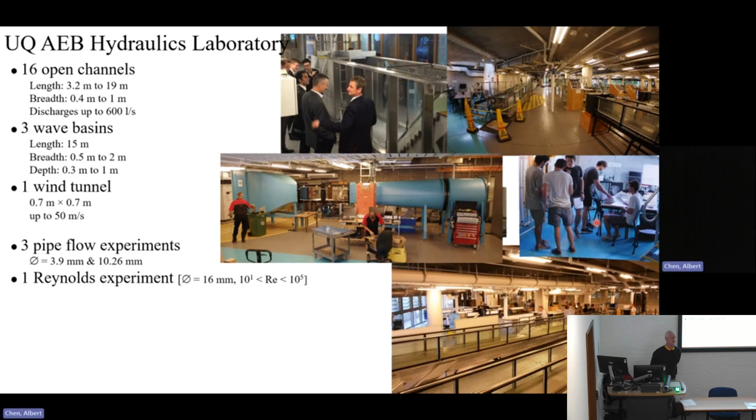And all these flumes are used for teaching experiments, and we have typically a total of 10 to 12 compulsory laboratory practicals that each of our students are doing during their undergraduate teaching.

These facilities are complemented with traditional and more advanced instrumentation: ultra-high-speed video camera, 1 million frames per second, phase detection probe, ADV profiler. But we continue to use a Prandtl pitot tube, a pointer gauge, and a Preston tube. They still have their value for a number of experiments.

I joined the University of Queensland 34 years ago. I'm not young anymore. I've been, for all that time, a teaching and research academic, like most of you academics, a teacher. I'm doing 40% teaching, 40% research, 20% service and administration.

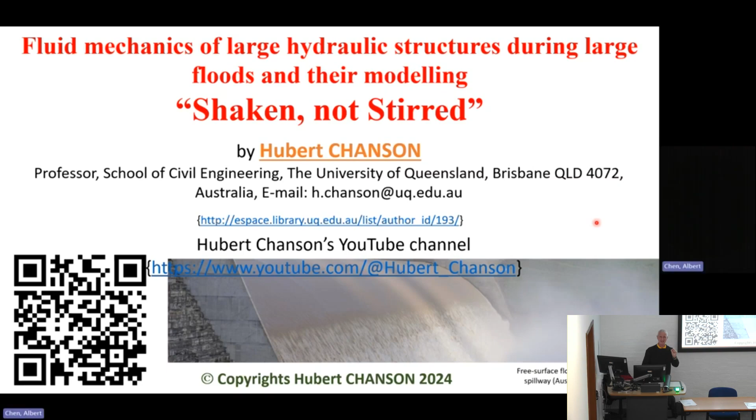But in the spirit of conciseness, let's go to this talk. I would like to share with you some thoughts in relation to the fluid mechanics of large hydraulic structures during major floods, with the focus on their hydraulic modeling. And to some extent, this talk could have been entitled 'Shaken Not Stirred,' because I aim to shake your confidence in our capabilities to model these monsters.

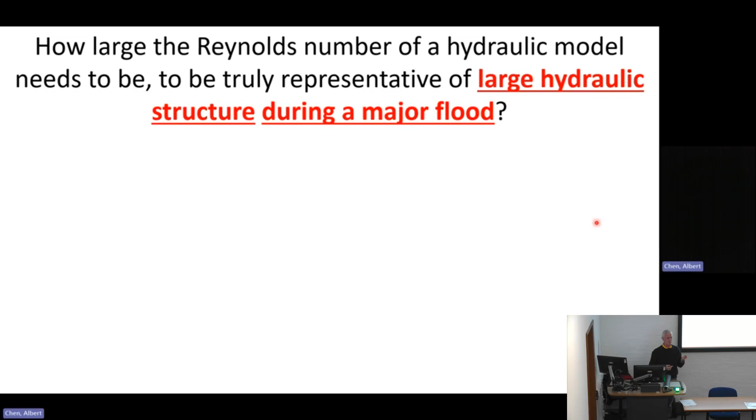We are going to try to address 3 key questions together. How large does the Reynolds number of a hydraulic model need to be to accurately predict the performance and characteristics of a large hydraulic structure during a major flood?

Can we trust hydraulic model data collected with a Reynolds number between 10 to the 4 and 10 to the 5 to predict the performance of large hydraulic structures? Here the expression hydraulic model refers not only to a physical model, but also a theoretical model or a computational model, with the Reynolds number being the Reynolds number of the validation data set.

On the third question: are prototype tests conducted for short duration and small discharge genuinely representative and good enough?

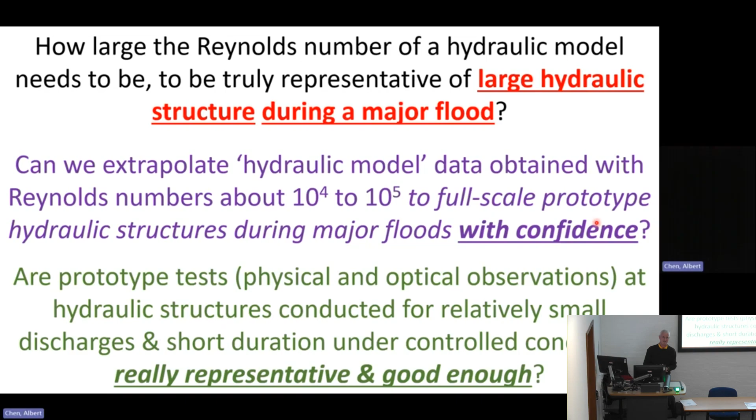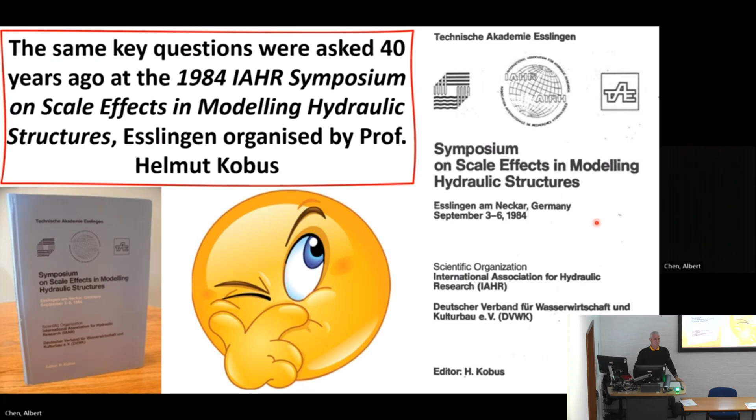Interestingly, these questions are not new. They were already discussed 40 years ago at an IAHR symposium in Esslingen. And unfortunately, we have not progressed much, as indeed there have been quite a few failures of hydraulic structures since.

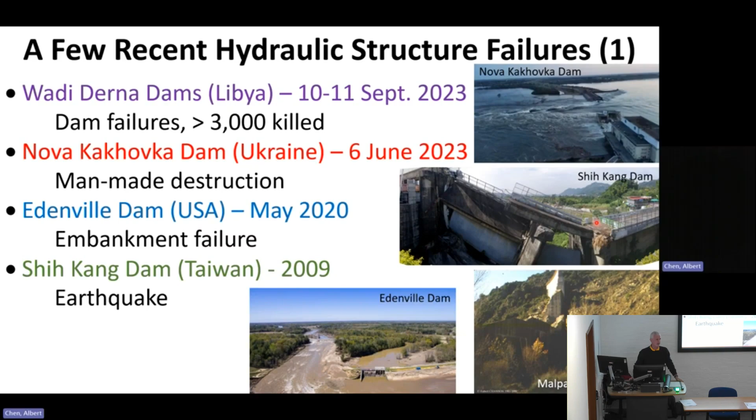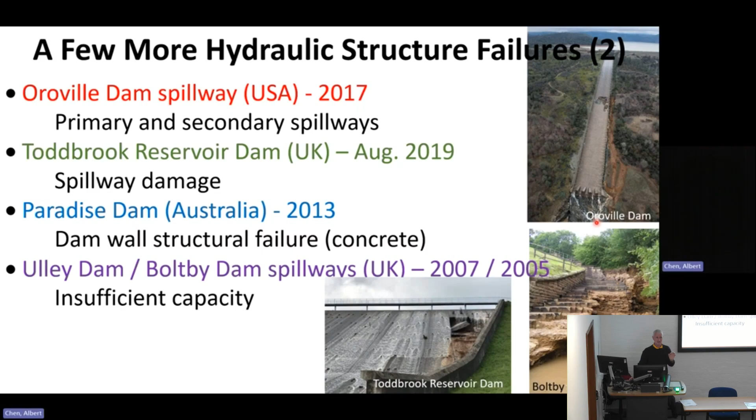We may remember the tragic failure of 2 dams in Libya last year, the destruction of a dam in Ukraine last year again, Oroville Dam spillway, Paradise Dam, and even here in UK, some problems with the Toddbrook Reservoir and Ulley Dam or Boltby dams, which were all near misses. So back to our topic.

We are going to talk a lot in the next 30 minutes about the Reynolds number. And I remind everyone that the Reynolds number is a dimensionless ratio of inertial force to viscous force.

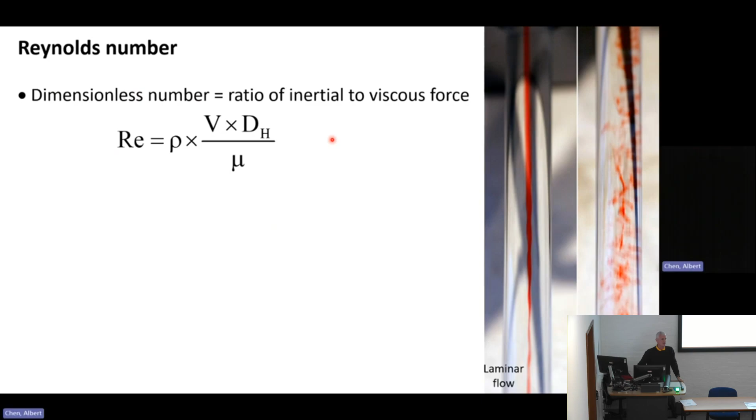Today I will use the definition shown in front of you on the screen, in terms of the cross-sectional average velocity and equivalent pipe diameter. That is the most common definition used in industry. It's the definition used in the Moody diagram. And with that definition, we can distinguish between laminar and turbulent flow on the right-hand side.

This is our experiment at the University of Queensland.

Within commercial pipes and channels, turbulent flow is observed when the Reynolds number is greater than 10,000, that is 10 to the 4. Today I'm going to be blunt: I'm going to talk about turbulent flow only.

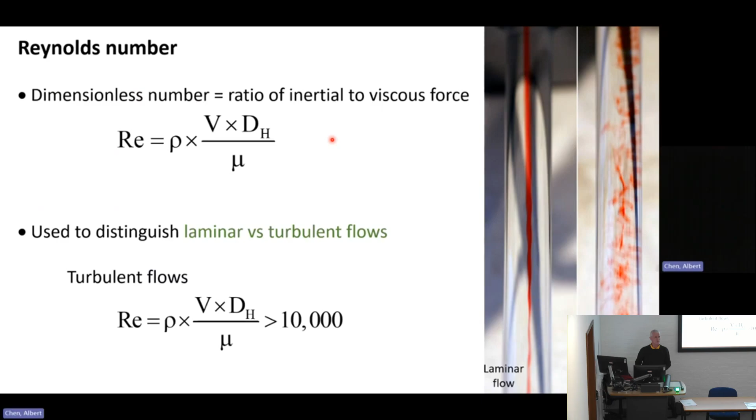So what is a turbulent flow? What types of turbulent flow can we encounter? A very well-known canonical turbulent flow is a developing turbulent boundary layer.

Boundary layer, a concept introduced by Ludwig Prandtl in 1904. A few years later, in parallel with his own former student Theodor von Karman, Prandtl developed this equation called the momentum integral equation, linking the growth of the boundary layer properties directly to the boundary shear stress, shown here.

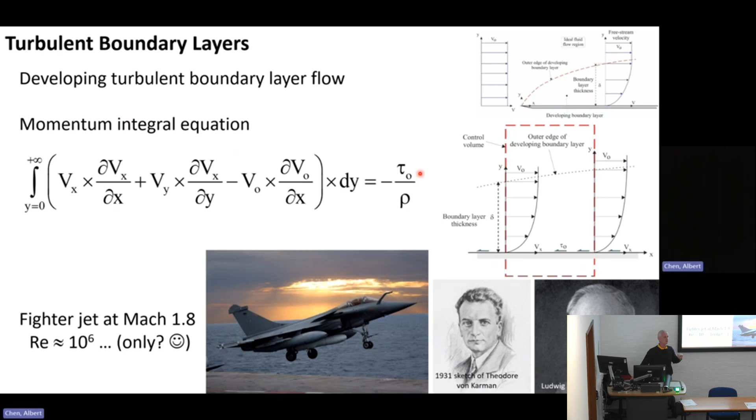If we think of a relatively well-known developing boundary layer, for example along the wing of an aircraft, and use a fighter jet flying at Mach 1.8, the Reynolds number of the boundary layer at the trailing edge is of the order of 10 to the 6.

Of course, another canonical turbulent flow is a turbulent pipe flow. Most of you should be familiar with smooth turbulent pipe flow and this famous equation developed by Ludwig Prandtl, based upon integration of the Navier-Stokes equation using the Prandtl mixing length.

Interestingly, this equation, which is the velocity profile in a smooth turbulent pipe flow, was developed by Ludwig Prandtl for the entire cross-section, not just a small region.

His students further contributed to a number of correlations, with the graph on the far right showing the Darcy friction factor as a function of the Reynolds number for smooth pipe flow. The red symbols are the superpipe dataset collected in North America in the late 1990s, compared with the correlation of Heinrich Blasius, a PhD student of Ludwig Prandtl, building on the work of Karman, Nikuradze, and Prandtl himself.

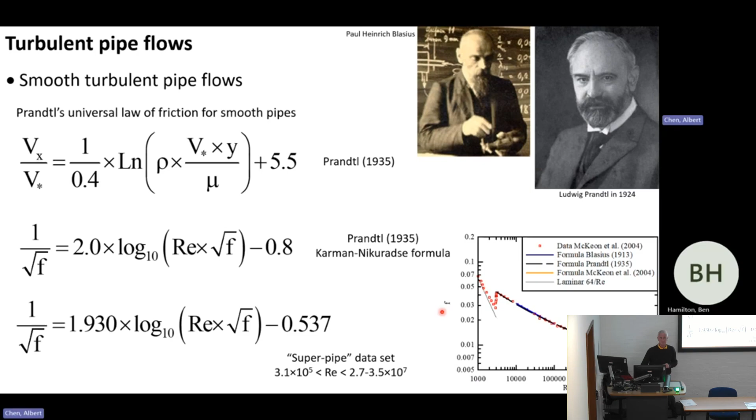Of course, another type of turbulent pipe flow is a fully rough turbulent pipe flow. Prandtl again developed an expression for the velocity profile, and his former student Johann Nikuradze developed this correlation of the Darcy friction factor for fully rough turbulent flow. Interestingly, this correlation is still valid many years later.

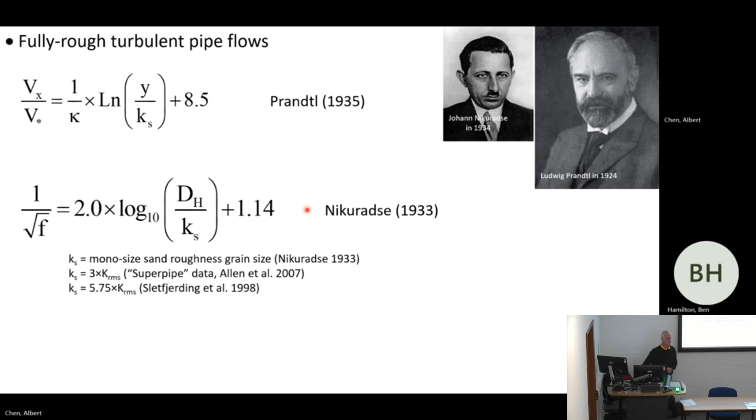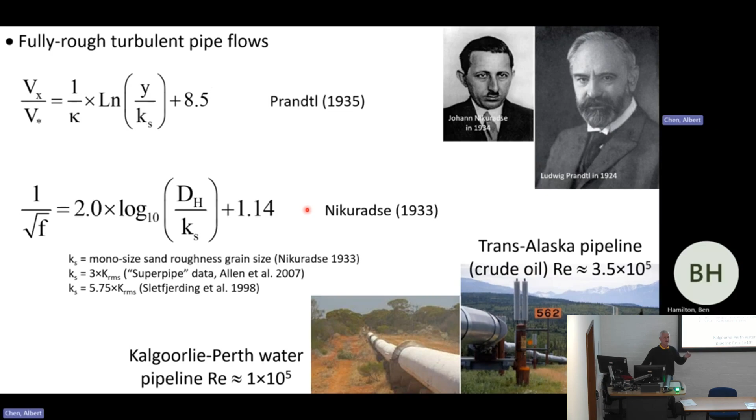Looking at commercial pipelines, for example the Trans-Alaska pipeline carrying crude oil, or the Perth-Kalgoorlie pipeline, 600 kilometers long, carrying water, at design capacity - that is 100% capacity - they operate with Reynolds number of 10 to the 5.

Of course, a third type of canonical turbulent flow is a turbulent free surface flow. Today I will restrict myself to free surface flow in large hydraulic structures during major floods.

These flows are turbulent, implying that when we do hydraulic modeling, the Reynolds number in the hydraulic model, subscript m, must also be turbulent, must be greater than 10,000.

When we do a combined Froude and Morton similitude, we will end up with a Reynolds number in the model, subscript m, much smaller than the Reynolds number in the prototype, subscript p. Thus the Reynolds number provides an order of magnitude of the flow because it's proportional to the mass flux.

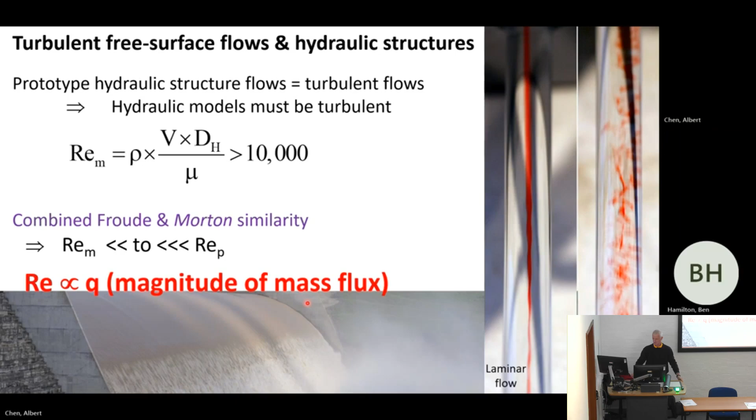Of course, at this stage someone could ask me, what about the Weber number? I mean, I talk about Reynolds, Froude, Morton - how about Weber? I could argue that in a large hydraulic structure there is no capillary effect. That's true, but that's very simplistic, and it's probably not the right way to teach the topic.

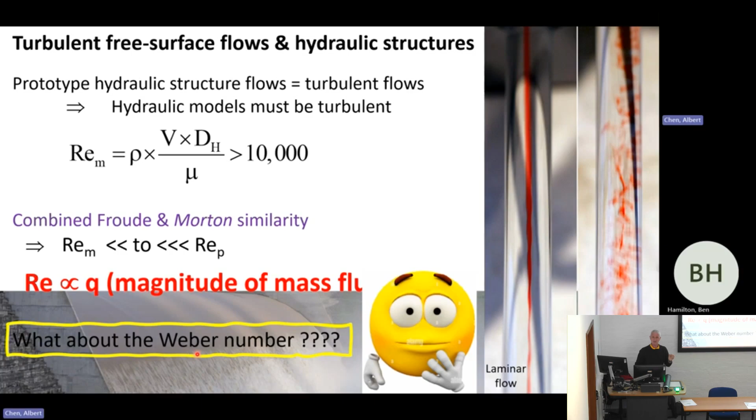There is, in fact, a much better justification, a more meaningful justification for ignoring the Weber number as I do. That comes to a dimensionless number called the Morton number, named after the lady on the bubble, Rose Catherine Morton, defined as a function of the gravity acceleration, fluid density, fluid viscosity, and surface tension.

Why is this number important? Because Professor Helmut Kobus showed about 50 years ago that the Morton number can be expressed as a function of the Weber, Reynolds, and Froude number.

If you remember the Vaschy-Buckingham theorem, also called the pi theorem, any dimensionless number can be replaced by a combination of itself and other dimensionless numbers. Thus, potentially, we could replace the Froude number, or the Reynolds number, or the Weber number by the Morton number.

Now, coming back to the modeling of free surface flow. In free surface flow, gravity effects are always important, so the hydraulic modeling must be performed using a Froude similitude, that is, the Froude number is the same in model and prototype.

Further, most hydraulics laboratories don't have a lot of money. That's the case at the University of Queensland, that's the case at the University of Exeter. We will use the same fluids in model and prototype, air and water, implying that the Morton number is going to be a constant between model and prototype.

So in turn, the Weber number is no longer an independent parameter, it is a function of the Reynolds number. When we do hydraulic modeling of free surface flow, implicitly nearly everybody is doing a combined Froude and Morton similarity. The differences in Reynolds number between model and prototype will account for potential viscous and capillary effects, while the Weber number becomes totally irrelevant.

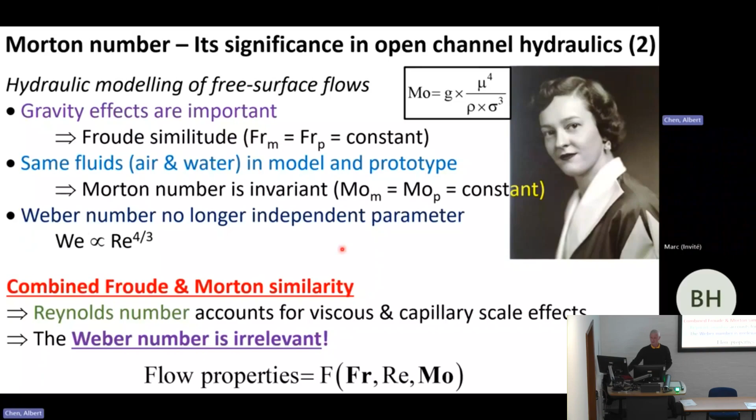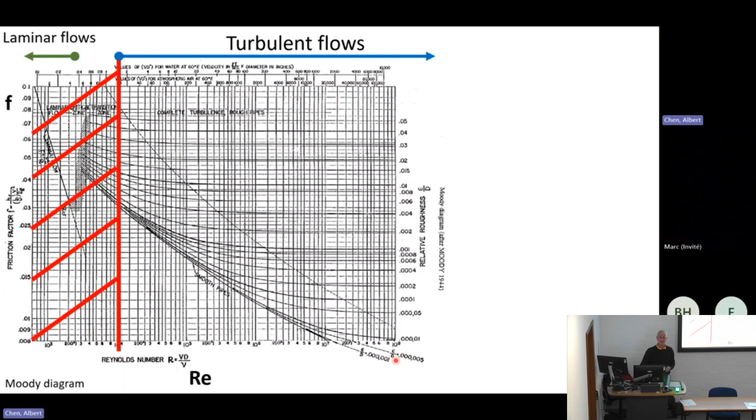We will ignore the left-hand side of the graph because we are only focusing on turbulent flow. If we are dealing with small hydraulic models, typically with Reynolds number between 10 to the 4 to 10 to the 5, this dashed area will illustrate the range in terms of the Reynolds number, but also in the range of the dimensionless boundary shear stress, with a lower limit corresponding to smooth turbulent flow. And I remind everyone, in particular students, that the flow resistance in Newtonian fluid flow cannot be smaller than that of smooth turbulent flow.

Large hydraulic models will operate with Reynolds number between 10 to the 5 to 3, 10 to the 6. You can see that on this dashed area, not only is the range of Reynolds number different, but we start to see some difference in the range of dimensionless boundary shear stress.

Small prototypes operating at small discharge for short duration, we operate with Reynolds number between 5, 10 to the 5 to 3, 10 to the 7. On large hydraulic structures during major floods, and you will see some photographs shortly, we'll operate with Reynolds number between 10 to the 7, 10 to the 8, 10 to the 9, and potentially more.

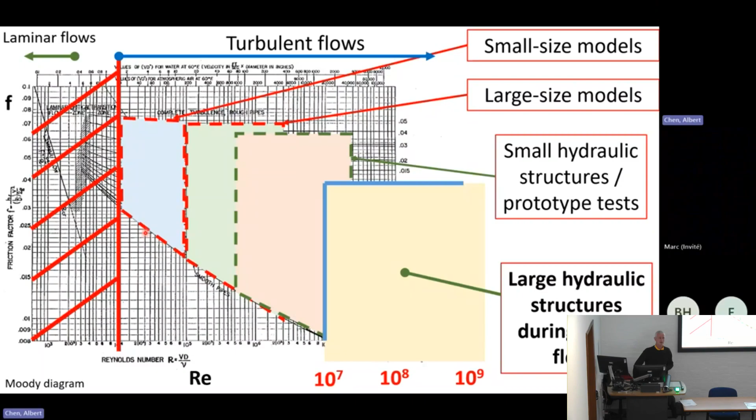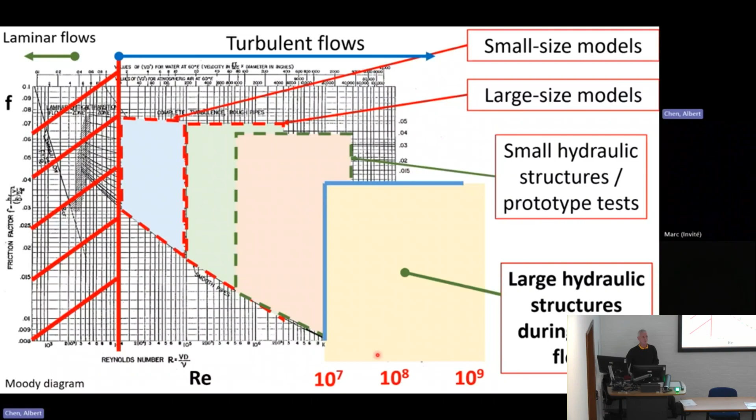And to paraphrase the Americans, we have a problem, Houston. We are outside of the boundaries of the Moody diagram, both in terms of the horizontal axis, but in terms of the vertical axis. So much for scaling, so much for modeling.

So let's talk about the key focus of this talk, and the key message I want to share with you: model prototype compliance for large hydraulic structures during major floods. I call this the inconvenient truth, and you will hear later on what I mean by that.

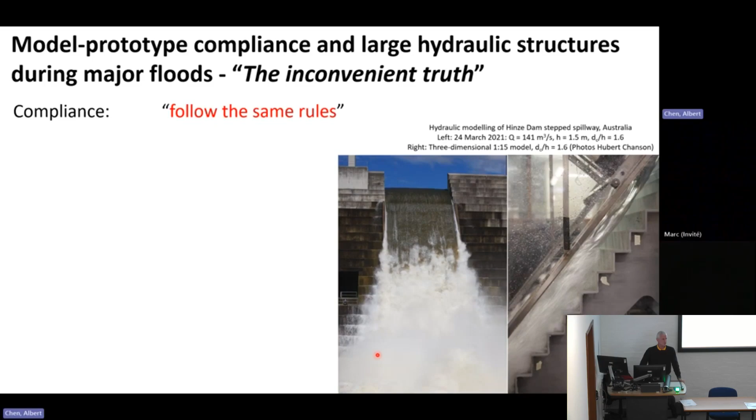I remind everyone that compliance means that we follow the same rules, the same rules of similitude - geometric, kinematic, dynamic similarity. We also follow the same basic equations of fluid mechanics: conservation of mass, of momentum, of energy.

Compliance might be qualitative or quantitative. I'm always skeptical of qualitative compliance because it's too close to visual illusion, particularly to people who have no experience in prototype hydraulic structures during major floods. Instead, as professional engineers, we should focus on quantitative compliance: at the 0th order, within 100%; at the first order, within 10%; at the second order, within 1%. And in hydraulic engineering, we never go beyond the second order.

Finally, when we talk about compliance, we need to emphasize that the notion of compliance is directly linked to the relevant design parameter. A hydraulic model might be compliant in terms of the discharge capacity and dimensionless discharge coefficient, but might not be compliant in terms of the rate of energy dissipation.

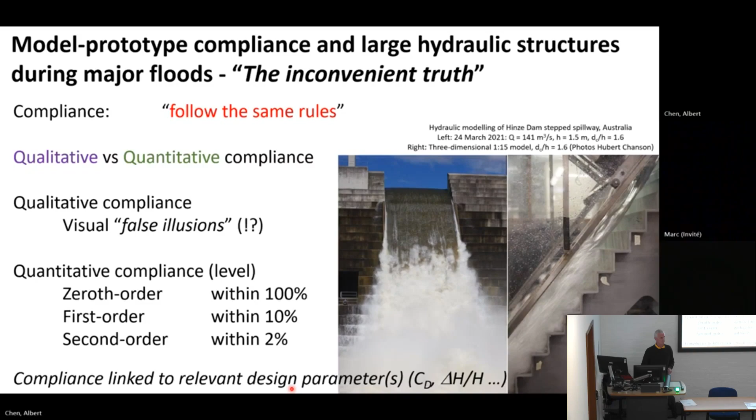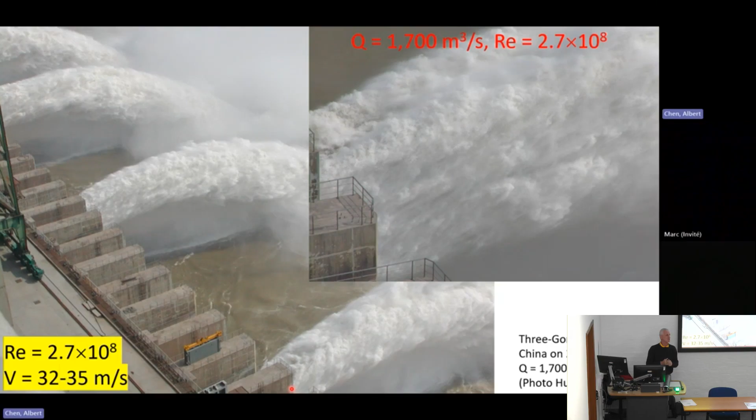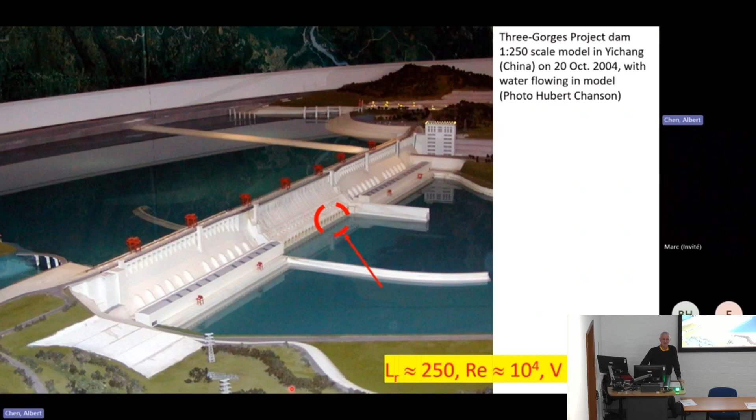I saw this small physical model, 1 in 250 scale, at Yichang nearby, and I'm highlighting with the red arrow the bottom outlets, a few millimeters by a few millimeters. Would you trust such a physical model to predict the characteristics of the bottom outlets? Definitely not. It's a no.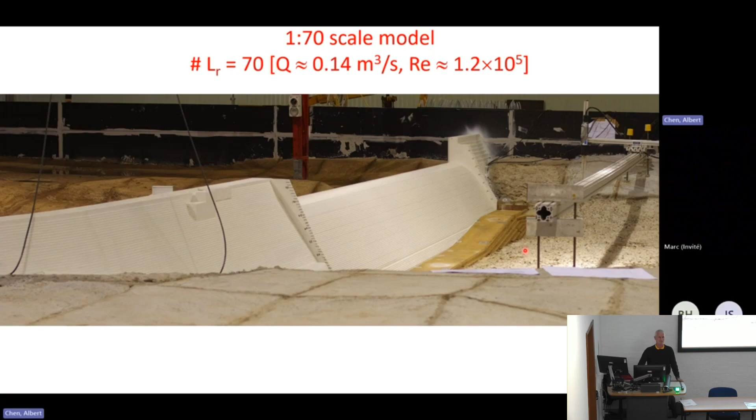This physical model at the scale of 1 in 70 was developed with a mobile bed downstream of the stilling basin, to look at the potential scour that could develop downstream. For qualitative patterns, this physical model might be okay in terms of sediment transport, possibly to the 0th order. But I will definitely not trust this physical model to predict the rate of energy dissipation on this large dam.

This is the Clyde Dam spillway in New Zealand, South Island, photograph courtesy of Graham Quinn. A key feature of this spillway is the presence of a bottom aeration device about 1/3 down the spillway chute. At the downstream end of each pier you can see the intake of the chimneys supplying air to the air slot. The purpose of the air slot is to introduce artificial air downstream to prevent or reduce the risk of cavitation damage.

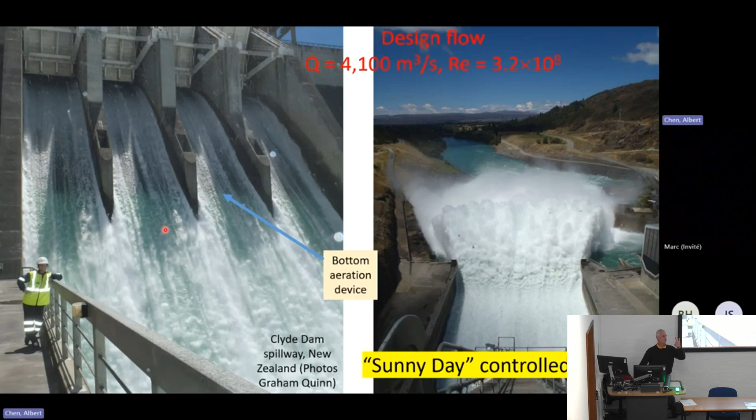Risks were very high for this project at design flow conditions, corresponding to a Reynolds number of 3.2 times 10 to the 8. There were 3 physical studies to investigate the flow properties of this dam spillway and its air slot, and my PhD study was in fact the third of those studies. I took this photograph myself during my project.

You can see on the top left the model of the air slot. We did some measurement of air concentration and velocity in the jet, and the impact of the jet downstream. At the time of this particular photograph, I measured velocity of 18 meters per second at the downstream end - roughly about 60 kilometers per hour in a laboratory model.

This model certainly gave us very nice results, but it's only a sectional model, 250 millimeters wide. We knew already that we would have some sidewall effect, and we couldn't see the development of transverse turbulent structure. So in my opinion, such a model is not capable of providing us with quantitative compliance right to the second order.

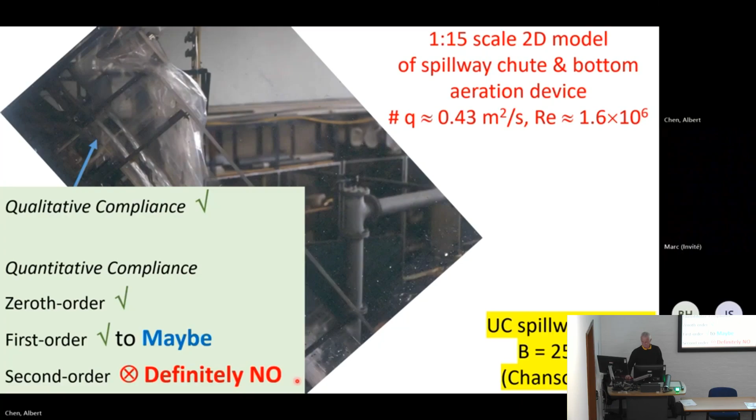This photograph shows the Hinze Dam stepped spillway in southeast Queensland, 1 hour drive south of Brisbane. Let us focus on this particular flow condition, Reynolds number of 5 times 10 to the 7, for which the dimensionless ratio of critical depth to vertical step height was 1.6. This number is proportional to a Froude number defined in terms of the vertical step height. So on the next photograph I'm going to show you an experiment which is in Froude similarity with this photograph.

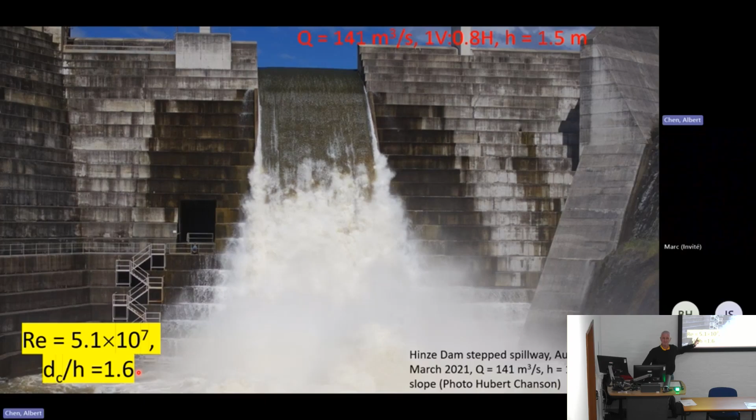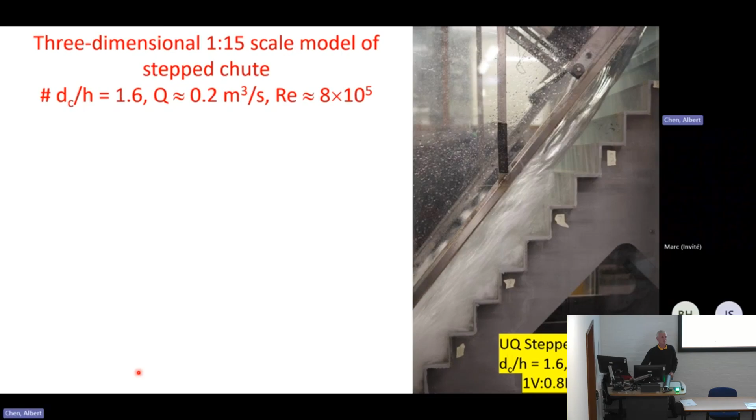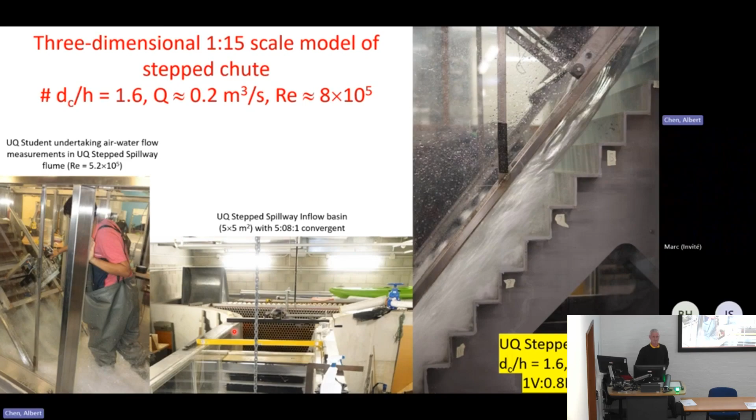This is a 1 in 15 three-dimensional Froude-similar model at the University of Queensland of the same spillway, for the same ratio of 1.6. We use a large model, 1 meter wide, enough for a student to go in wetsuit and waterproof trousers. We have an intake basin that is 5 meters wide. You can see the kayak here for comparison, with our test section about 1 meter. That model definitely provides us with very nice results.

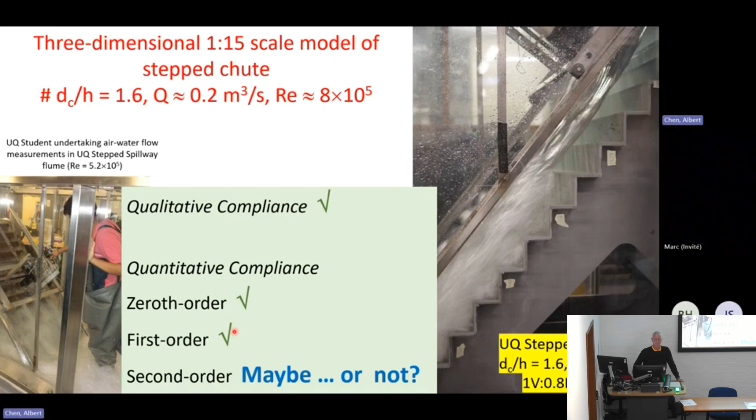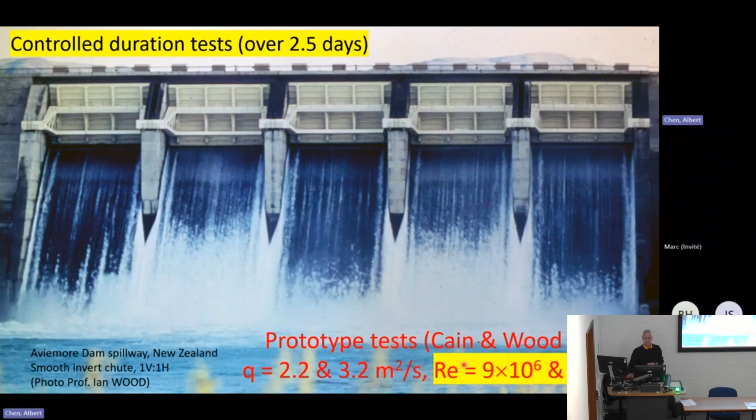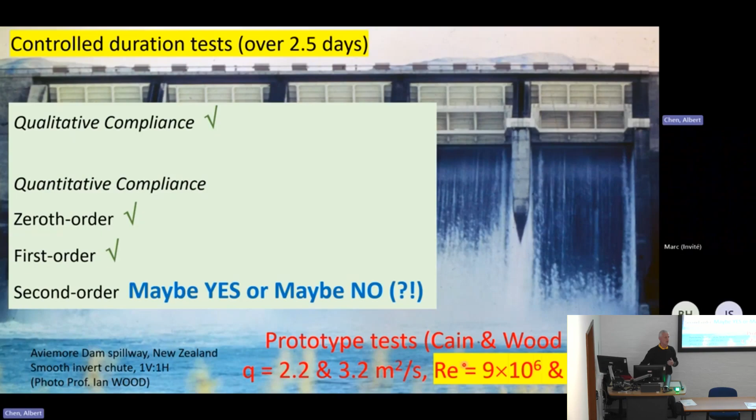Here some tests were done for short duration, a few hours over 2.5 days, with Reynolds number of 9 times 10 to the 6 and 1.3 times 10 to the 7. Again, we need to ask the question: this is probably good enough for first order compliance, but how confident are we that we could extrapolate this result to Reynolds number 10 to the 8, 10 to the 9? Who knows?

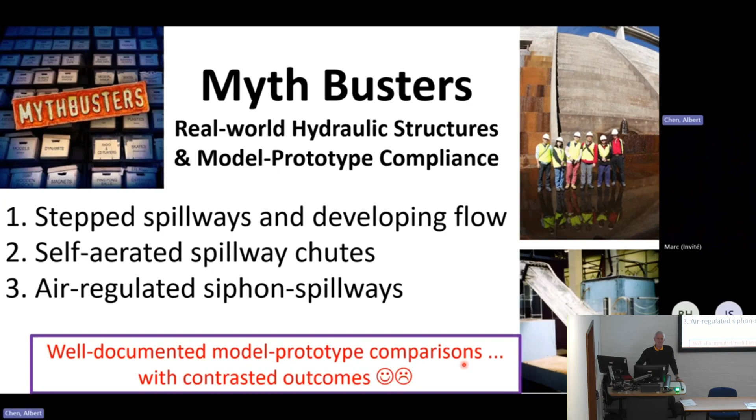So the next part is we are going to review some hydraulic structures for which there have been detailed model-prototype comparisons with contrasted outcomes, starting with step spillways on the developing flow region.

On the right here you see the photograph of the Hinze Dam stepped spillway. I'm standing here with 3 of my former PhD students: Gong Fu and Sophia, who are still in Brisbane in the industry, and Hong, who is at Sichuan University as a professor. This is Jason and Stuart, our technical staff.

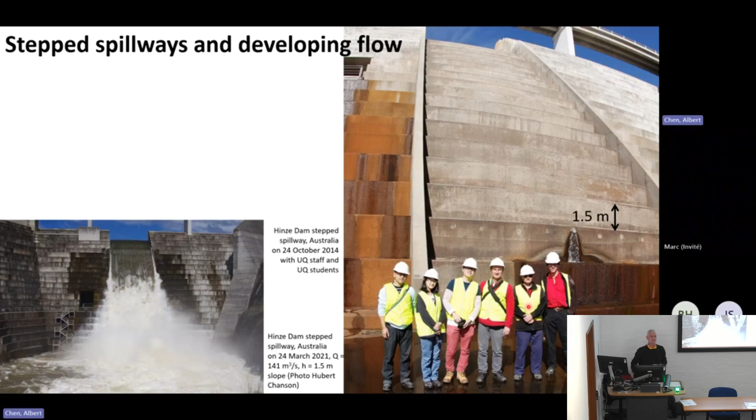A step spillway is basically a steep chute equipped with a staircase invert designed to dissipate some of the energy, and in turn we have a form-drag-dominated flow resistance, which leads to a highly turbulent flow, with turbulent intensity measured in prototype and in the model of the order of 100%.

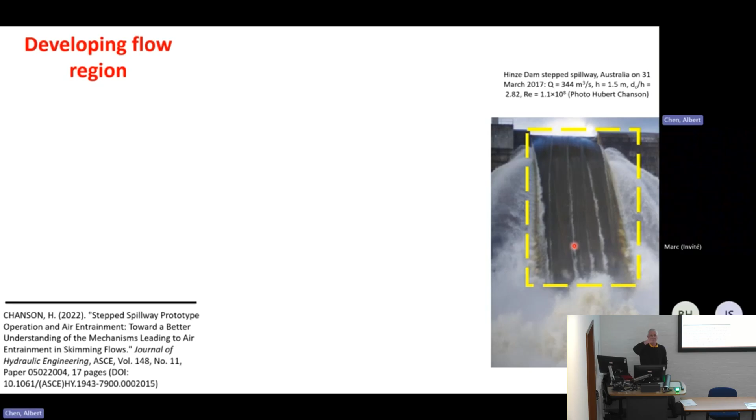Prototype data are shown in blue and green for Reynolds numbers of 1.1 times 10 to the 8 and 4.5 times 10 to the 7. The red line is the application of the Bernoulli principle to the ideal flow region, and the black crosses are laboratory data from a 1 in 15 scale 3-dimensional model using a Prandtl pitot tube. Here we have superb model prototype compliance right up to the Reynolds number of 10 to the 8.

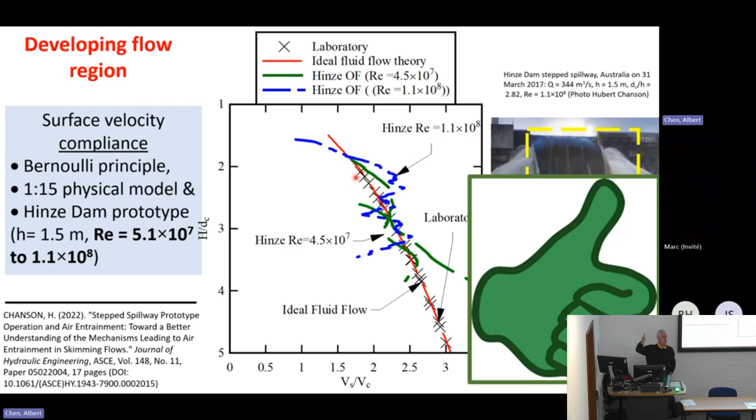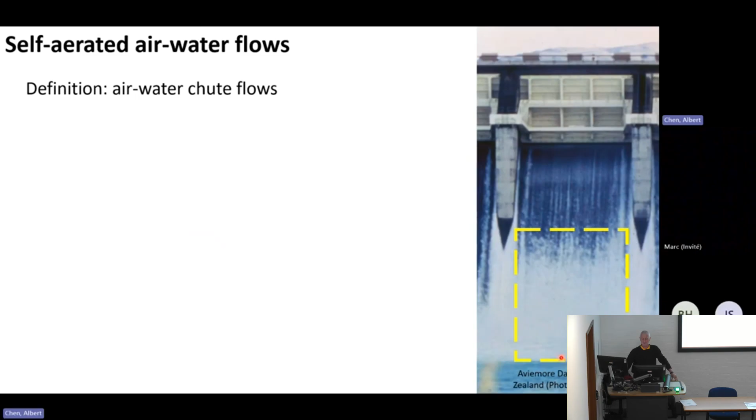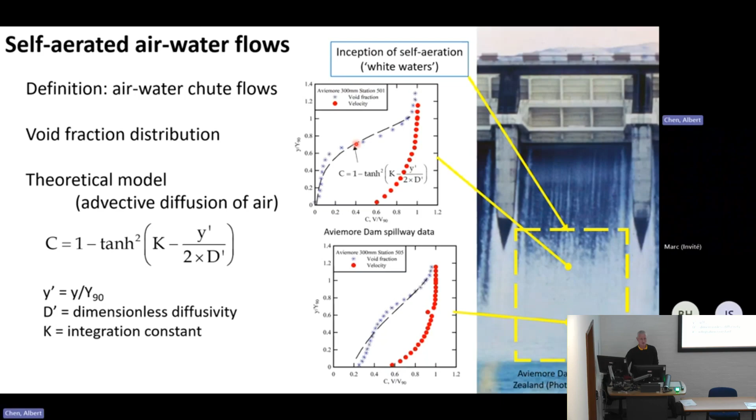The blue asterisks represent the air content or void fraction. The larger the void fraction, the more air; 1 means pure air, 0 means clear water. If we look more specifically at the distribution of air concentration, it is modeled with an analytical solution of the equation of advective diffusion for air, shown here as a thick dashed line on the graph. Overall, that's not bad. I would say probably thumb up in terms of model prototype compliance, and this time the model is an analytical model.

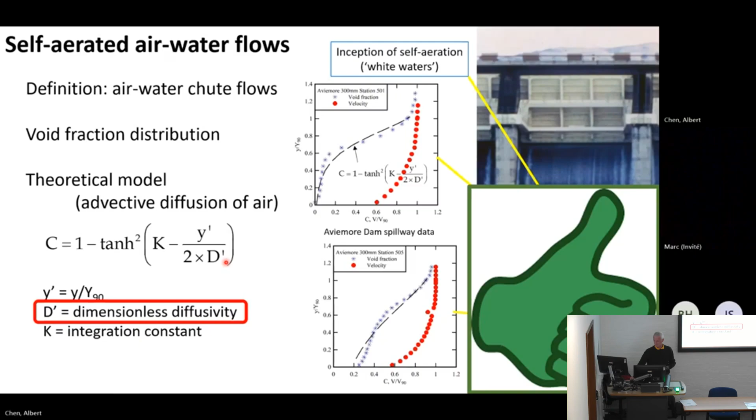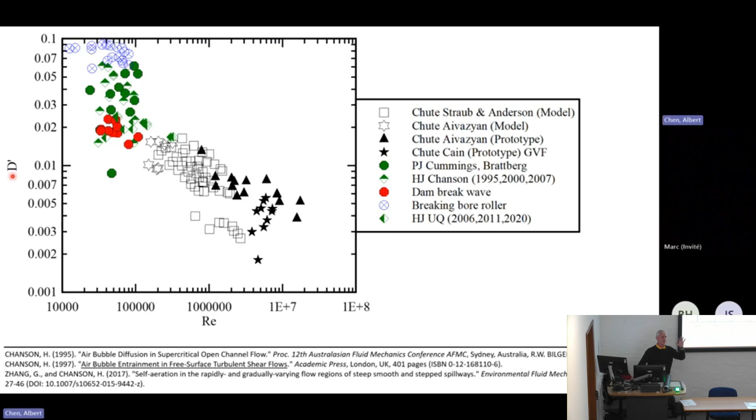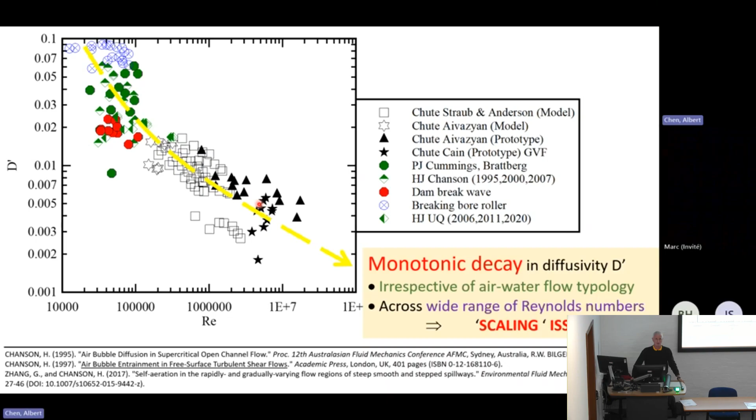But there is a term in this equation which is a dimensionless diffusivity. Let us spend a bit of time on this term. This graph shows a dimensionless diffusivity on the vertical axis as a function of the Reynolds number for a wide range of model and prototype data, over more than 3 orders of magnitude of the Reynolds number. The Aviemore Dam data are somewhere here. What we see is that, irrespective of the air-water flow typology, we have a monotonic decay in diffusivity with increasing Reynolds number. Clearly we have some scale effect. Thumb down in terms of model prototype compliance.

Last example: air-regulated siphon spillways. For those not familiar, a siphon spillway is a conduit in which the pressure at the highest point will be below atmospheric. They were very common during the late 19th and early 20th century, and one of their major disadvantages is that their startup is brutal. The discharge goes from 0 to maximum capacity in less than a minute, and it could be very dangerous for people living downstream.

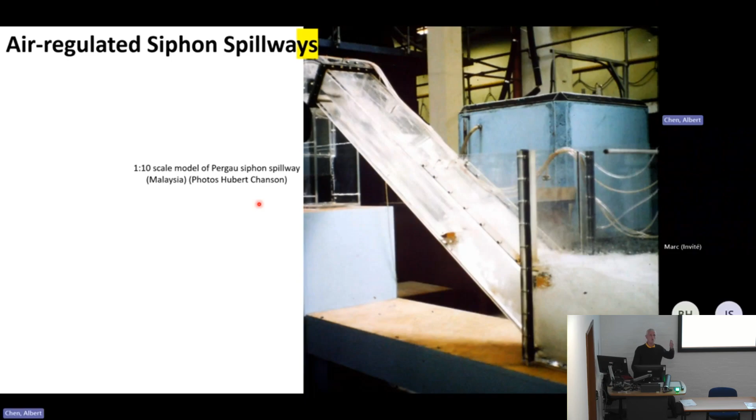So in the first half of the 20th century, there was development of this so-called air-regulated siphon spillway to control the release of flow. This is typically done by inserting a deflector, shown here in the photograph, which deflects the flow at the bottom against the opposite wall, with the jet impacting the opposite wall and a lot of air entrainment in a roller, somewhat similar to the roller of a hydraulic jump. By controlling the amount of air provided upstream of the roller, we can control the amount of water discharged from the siphon spillway. But it's extremely complicated.

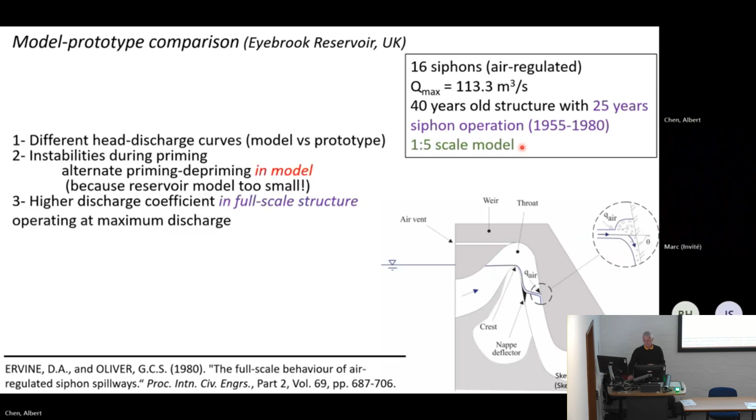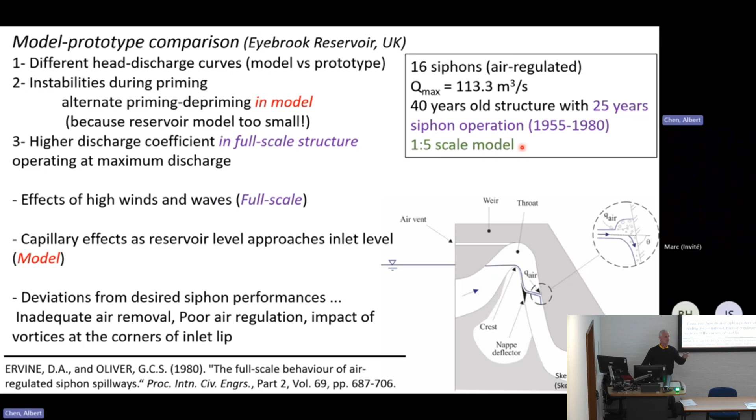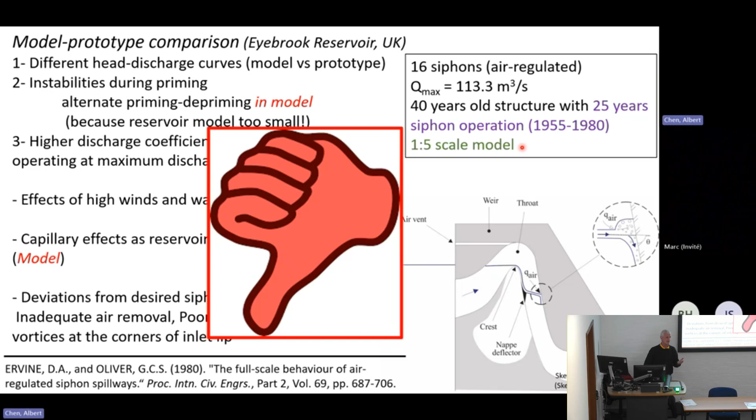Interestingly, and this isn't my work but that of someone else, in particular my late friend Alan Ervine, there was a superb model prototype comparison published in 1980, comparing 25 years of operation of an air-regulated siphon spillway with a 1 in 5 scale model, as well as 1 in 10 and 1 in 25 models. The results are disheartening: there were different head-discharge relationships, instabilities in the prototype not observed in the model, and instabilities in the model not observed in the prototype. Clearly here, thumb down, there is very poor model prototype compliance. That's probably why there has been no new development in recent years in air-regulated siphon spillways, to the best of my knowledge.

So we reach the end of this talk, but my conclusion is going to be a little bit lengthy. Let's try to wrap up a little bit where we are at.

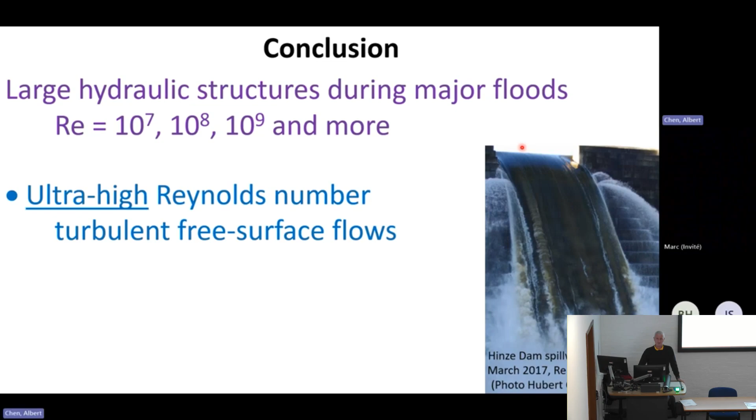Large hydraulic structures, during major floods, operate at Reynolds numbers of 10 to the 7, 10 to the 8, 10 to the 9, potentially more. Plainly, we are dealing with ultra-high Reynolds number, turbulent free surface flow. Let's call a cat a cat: this is not a small Reynolds number, this is ultra-high Reynolds number turbulent free surface flow. And their modeling is not trivial. I will say their modeling is extremely complicated, particularly because of validation, but also because of a lack of validation data sets.

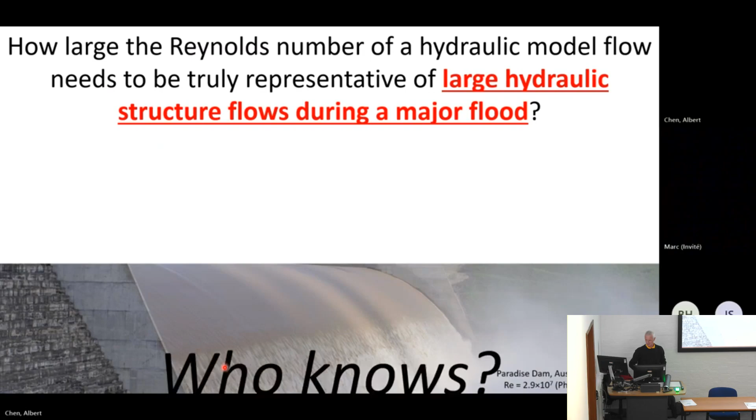So if I come back to the three challenges, the three questions that I asked you at the beginning: how large does the Reynolds number of a hydraulic model need to be to characterize accurately the performance of a large hydraulic structure during a major flood? Who knows? The larger, the better.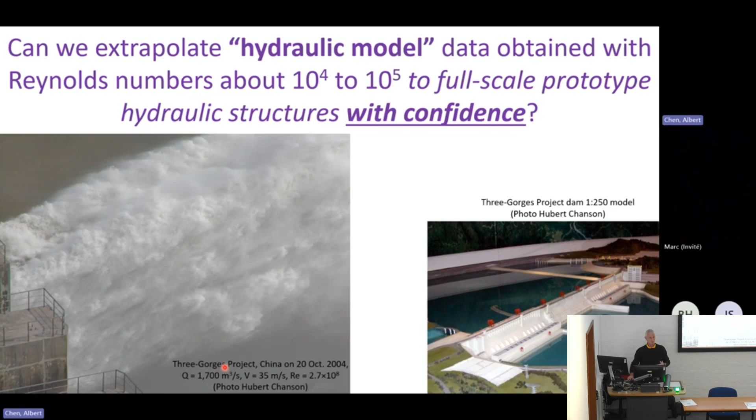Can we extrapolate hydraulic model data obtained with Reynolds number 10 to the 4 to 10 to the 5 to predict the characteristics of a large hydraulic structure? No, definitely no.

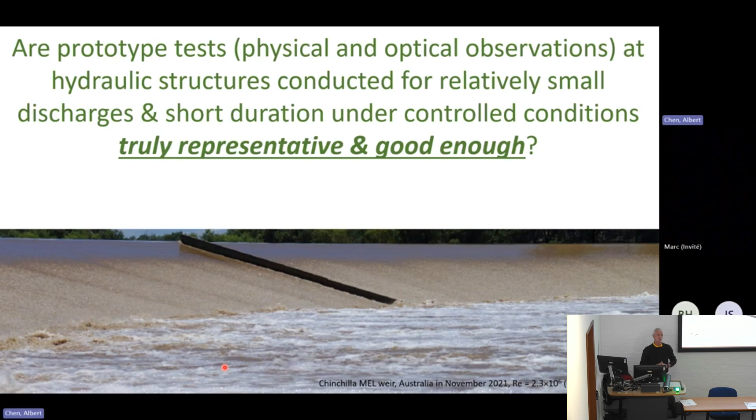Our prototype tests conducted for short duration and small discharge, are they genuinely representative and good enough? In my opinion, no.

So if I was going to summarize the key takeaways so far, and these are not my last slide because I don't like to finish with negative key takeaways: model prototype compliance of large hydraulic structures during major floods is very complicated. And bluntly, the inconvenient truth is that there is very poor model prototype compliance.

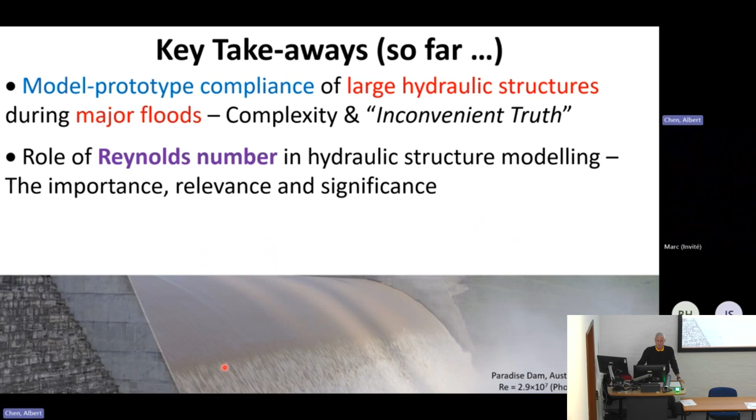I hope I've been able to demonstrate clearly to you the relevance and importance of the Reynolds number in the hydraulic modeling of large hydraulic structures. And we should never forget the magnitude of the rate of energy dissipation during a major flood, which could account for hundreds of thousands of nuclear bombs.

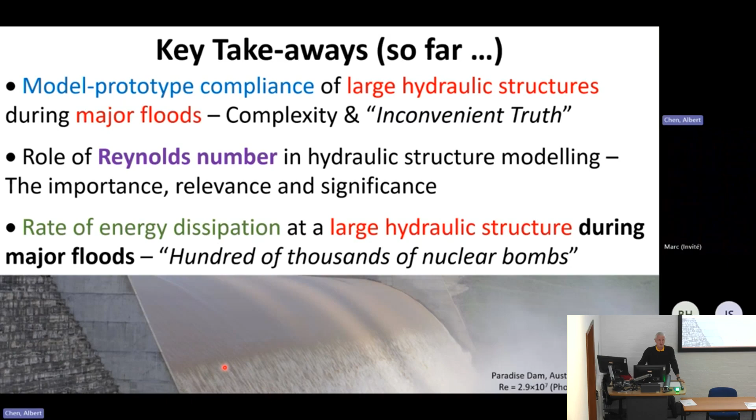But I think there's a ray of hope. My ray of hope is hybrid modeling Mark II.

In the last three to four decades, some people have argued that there is also a form of composite modeling that we call hybrid modeling Mark I, combining physical and computational modeling. Also, many studies that I've seen don't have a great synergy between the two, let's be honest.

But all these hydraulic modeling approaches all suffer from validation datasets obtained with small Reynolds numbers, 10 to the 4, often no more than 10 to the 5, which in my opinion is not good enough.

So I've proposed for a number of years, and I put this in black and white three years ago, hybrid modeling Mark II, combining physical measurement and field measurement using geometric similarity and Froude similarity conditions, with an overlap in instrumentation using intrusive and non-intrusive instrumentation.

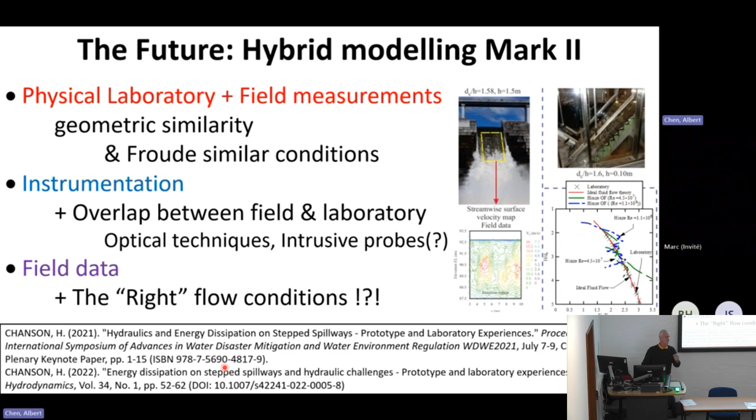Also, I will acknowledge that one of the challenges is always to get the right flow conditions in the field. Field measurements are never trivial.

One example where we've been successful so far has been the Hinze Dam spillway. On your far left, you see the prototype during one of the flood events, and we have analyzed a dozen flood events over the spillway. If you look very carefully at the bottom left, you see the contour map of the surface velocity for the photograph shown on top.

Now, hopefully, I hope in the last 25 to 30 minutes I've shown you that water engineering is not a desk job for desk jockeys. Thank you very much, and I will leave you with a slide to acknowledge a few people.

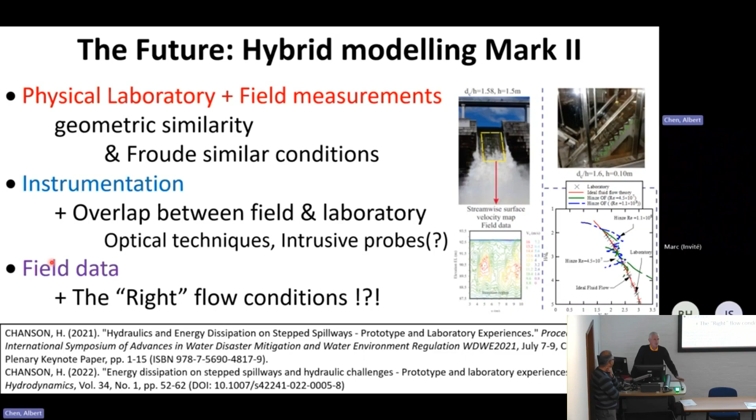So the question is about drone imaging. For the particular data set I was showing here, drone imaging doesn't work because it's not stable enough, and the quality of the camera isn't good enough. Drone imaging can probably give you some qualitative data, but I would definitely not trust it to apply that particular technique, optical flow, to obtain surface velocity.

Some of the challenges are related to the camera sensor. When you're doing a major flood, it's very often because there are storms and rain, and the light is usually very poor, so you need high quality camera sensors. This is the type of camera sensor I'm using, plainly an SLR camera that costs £1,500. I found that GoPro cameras, for example, were not sensitive enough for the light changes during a rainy period. On a sunny day, perfect; during a rainy period, definitely not.

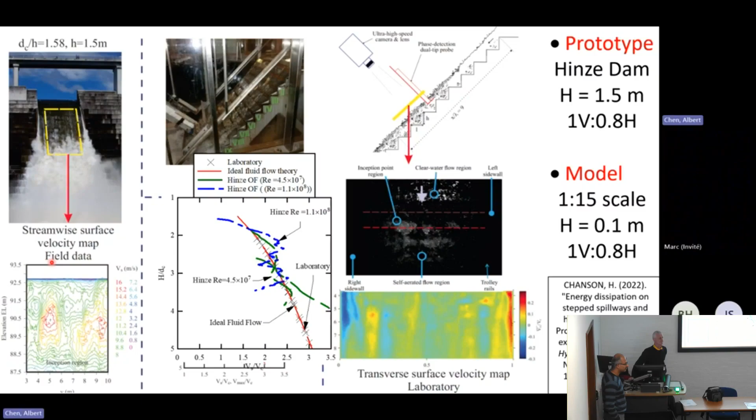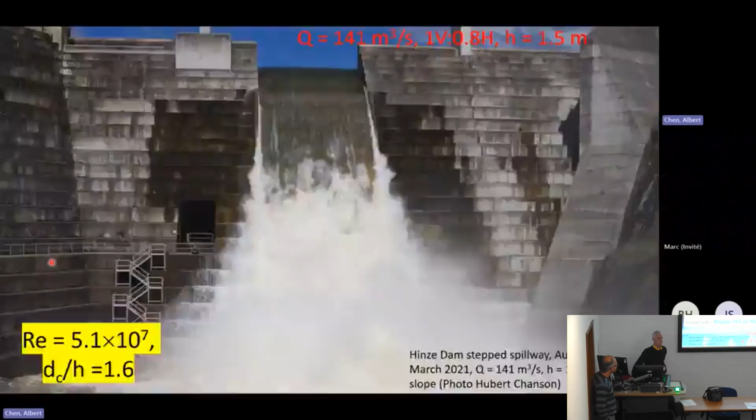I may ask something perhaps more related to the first part of your talk, when you explained some basic principles. A few months ago I had the great pleasure of visiting hydraulic laboratories at Ningbo University and Zhejiang University, where they have 6-7 different models dealing with water and air movement in closed conduits. For example, one thing they're building a lot in China and Hong Kong, and which is a big issue, is those 20, 30, maybe even longer vertical shafts. So would you have any general comment or advice on which issues should be looked at when we consider not only water but also air movement and the effects of air presence in closed conduits?

As soon as we have air and water present together with turbulent flow, it's very likely that we're going to get some air-water mix, and the water is no longer monophase - it's likely to be an air-water mixture. Every time we have two-phase flow, it's extremely complicated, whatever the size of the structure. In addition, closed conduits are probably even more complicated. I'm going to be blunt: in 40 years of work in two-phase flow, I've moved away from closed conduits because it's too difficult.

However, I've done some work about 10 years ago on drop shafts. In fact, we had about a 10 year project on air entrainment in drop shafts. There, I think there are situations when we can simplify the process. What I mean is that when dealing with closed conduit air-water flow, generally you're going to have different stages in the flow which could be very different from each other. For example, you'll have the shaft itself, then the impact region, potentially a deaeration chamber, and possibly a tailwater channel further downstream. If you're able to analyze each of these areas separately, you're going to start to get a better understanding of the key physical characteristics that need to be investigated.

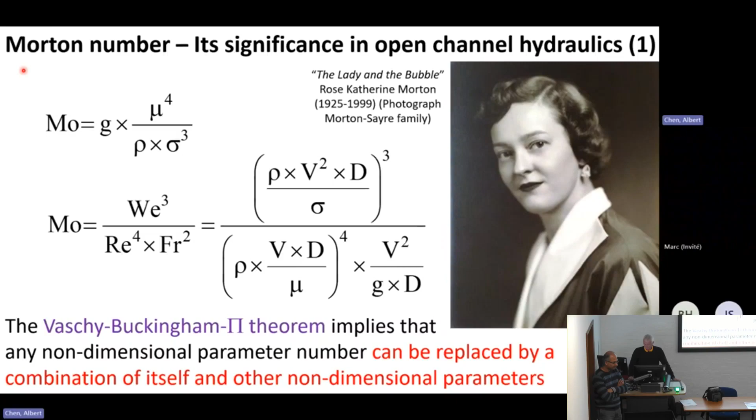And a provocative question: you haven't mentioned climate change impact on designing large hydraulic infrastructure. Given your experience, what methodological change would you recommend?

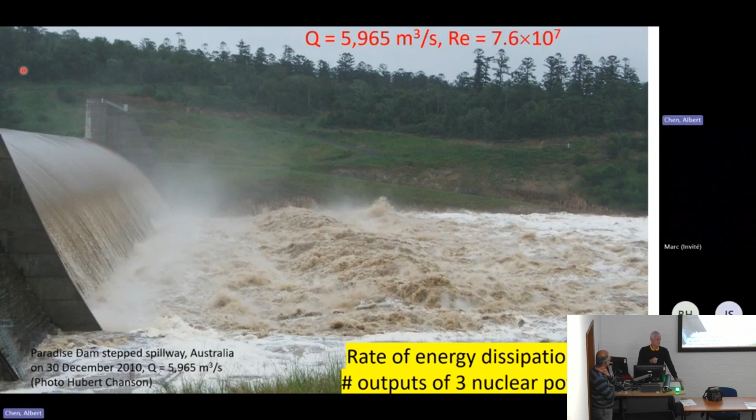Whether climate change is of relevance or not is a very interesting question. First of all, I think it depends on which part of the world you are. In Europe, people are talking a lot about climate change. In Australia, I was attending a keynote lecture just a few months ago, and I participated in a discussion on climate variability being a much more important issue than climate change. So, not an easy question altogether.

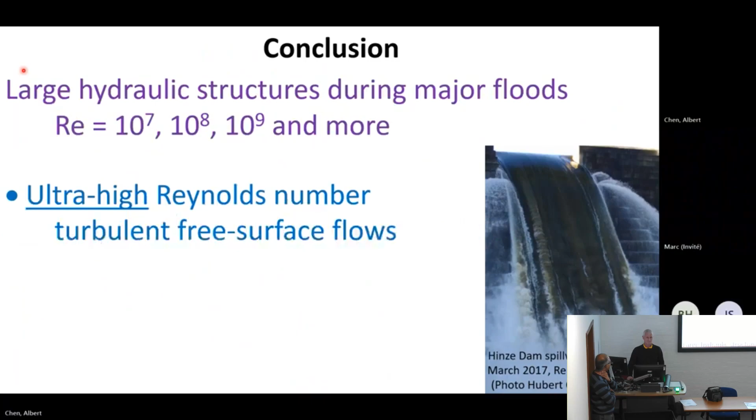I would like, however, and I'm not sure whether I'll be able to do it, to mention something else - bear with me, it's a slide which is completely at the end, not there. When someone starts to talk about the impact of climate change, one of the potential impacts is that there would be more hydraulic structure failures.

On the other hand, there have been, in the past, designs with different approaches, different design standards, different design factors. For example, near Brisbane we have a step spillway, the Gold Creek Dam Step Spillway, 1890, still in use 140 years later, built with completely different standards from current RCC dams, for example. I think there's also a difference related to political and economical environment. If we think of hydraulic structures from the late 19th, early 20th century, providing water 24/7, providing resources and water supply to the community was a priority for the government, and the economical interest or motivation were not what they are today in 2024.